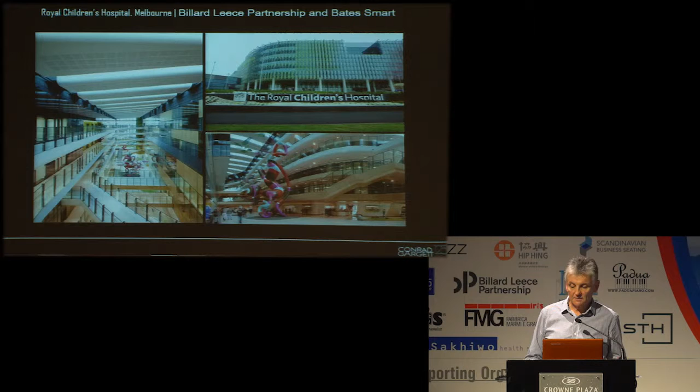But the first in the sequence of the three children's hospitals is in Melbourne, and you've all seen this one because I think it was the subject of numerous Academy Awards. It features, as many new hospitals do, a large naturally lit atrium to help organise the planning, the circulation and provide a less institutional environment. Currently under construction, due for completion in 2017, is the Children's Hospital in Perth. A similar scheme in many ways. It uses a large single atrium to create an internal armature for the building, lots of glass and plenty of light.

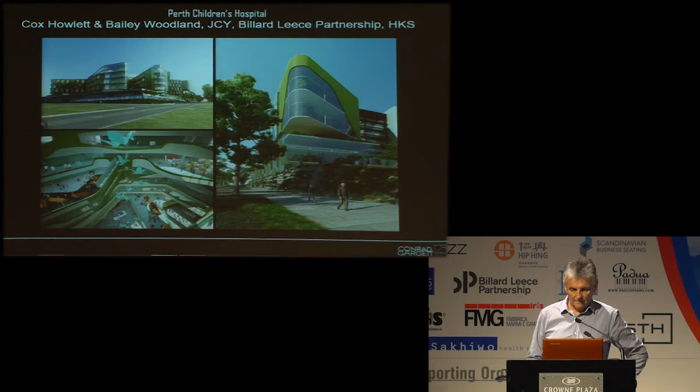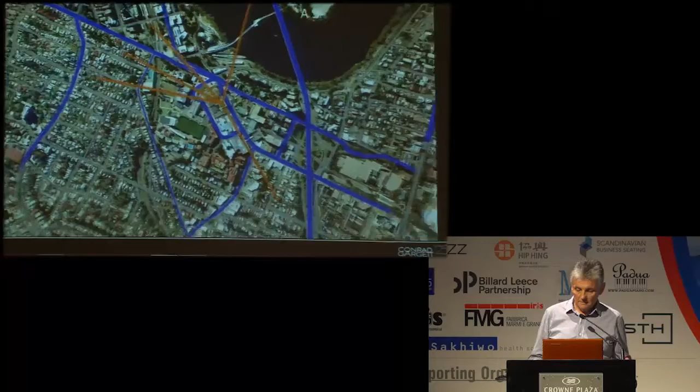Returning to Queensland, and this, the new Children's Hospital, which is now named the Lady Cilento Children's Hospital. Of a hub, a network of care across the state. It's the linchpin, but each element of that system of care is critical, from the community services through the regional secondary providers through to the teaching tertiary hospital that is the QCH. The QCH will reach out across the state, be that through outreach clinics, telehealth, or in fact for the sickest children retrieval services, to ensure that every child, no matter where they are in Queensland, has access to the very, very best care. So it's the hub of a very large network.

I might just ask you to turn the volume down on the videos, if you don't mind.

The hospital, while serving a large network throughout Queensland, is about 20 minutes walk from the CBD of the city. It's adjacent to the large Mater Hospital campus, which is both public and private, and two schools, and a major recreational park, the South Bank Parklands, for any of you who've been to Brisbane. It's very much an urban hospital in a tightly occupied environment with all the constraints of a brownfield site, busy roads, high pedestrian traffic and dense infrastructure.

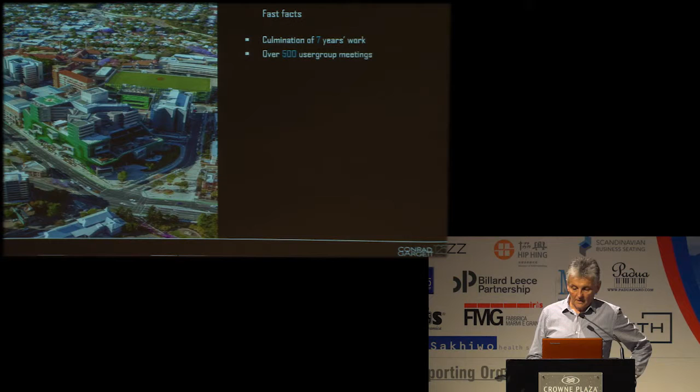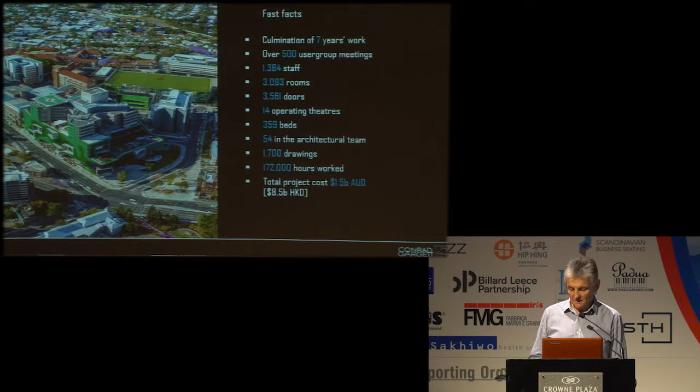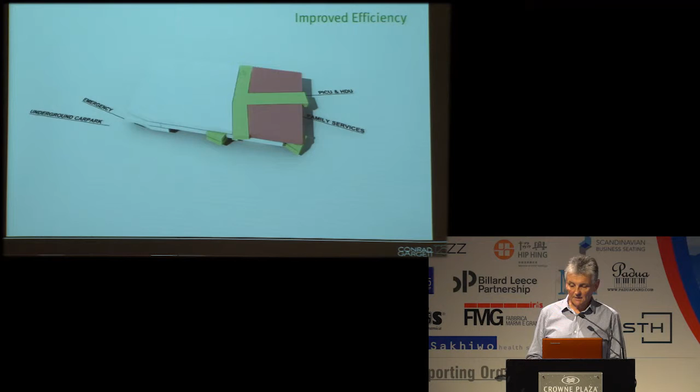This reflects our approach originally in bidding the project, which was the desire to deliver a more appropriate building type for a children's hospital. Not different from the general functioning of a hospital, so addressing all of the functional needs, but somehow creating a more appropriate hospital for children. A large tertiary hospital on a standalone facility reflecting key functional relationships, efficient clinical planning as required by hospitals, logical circulation with an efficient net to gross.

However, our contention was that it would not be, like many, a sealed box. Our approach was for a child and family-friendly building, a more normal, less institutional environment, and a much more connected and open building. It was a philosophy we'd been developing for some time, and here was our opportunity to put it into practice.

Our vision was for a new type of facility, open, connected to community, both physically and visually, permeable. For us, this was critical. Patients, particularly children, should not feel as though they've been taken out of their family and community, put in a sealed box and made to feel isolated and different.

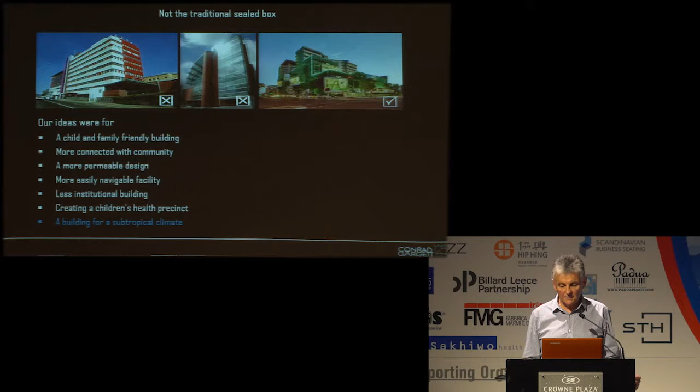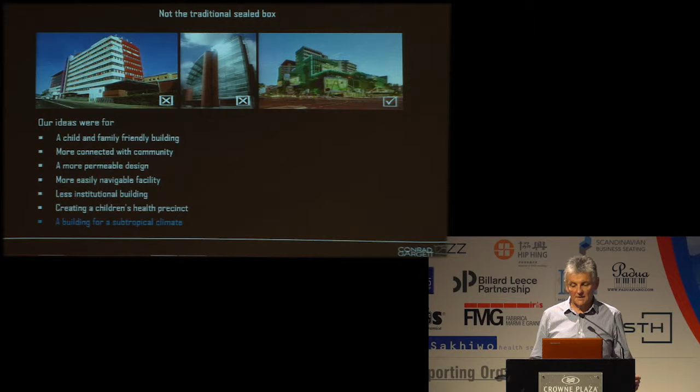Fortunately for us, these were jointly held philosophies of our client and across our design, and I might say construction and procurement team, everybody got it. Continually reinforced through extensive consultation and research. Brisbane's climate helps. Today in midwinter in Brisbane, it'll be 20 degrees, sunny, and with a humidity at about 48%, I think. Overnight it was a cool 8 degrees, so all of these factors allow us to open the building to the outside.

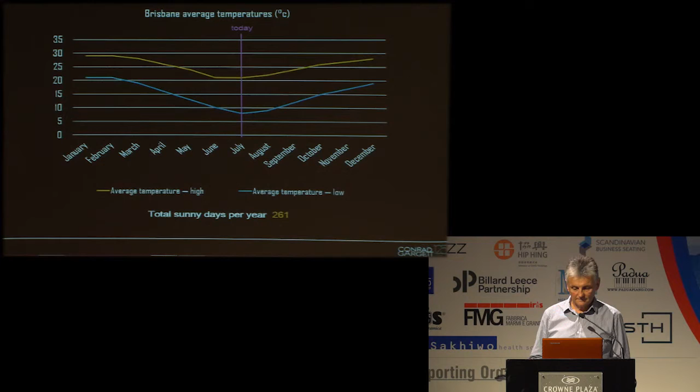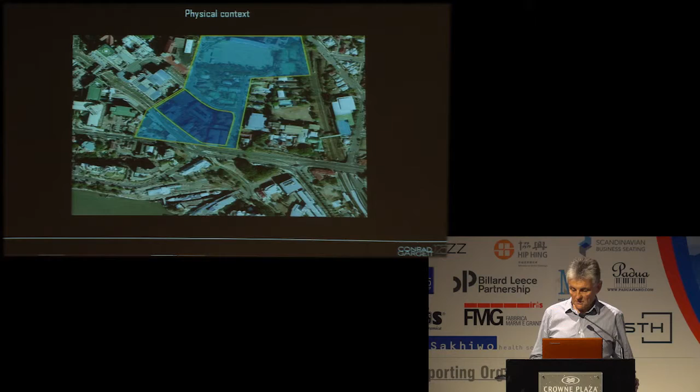Returning to the site, the actual site that we were master planning on was significant. The brief included a research facility, a central energy facility, carers accommodation, critical enabling works, as well as the main children's hospital. The major elements of this master plan have now been delivered. The hospital at more than 100,000 square metres, 20,000 square metre research building, and a central energy plant as well as the enabling works.

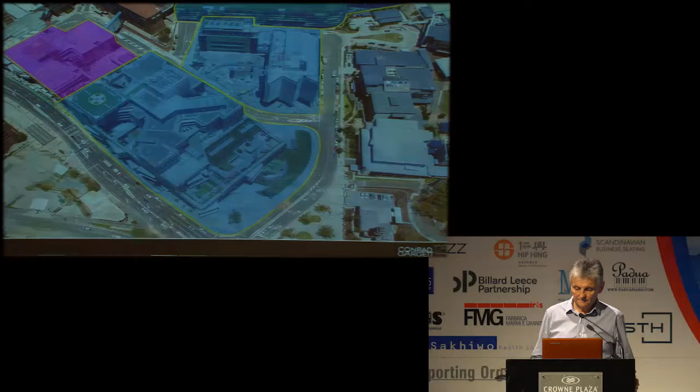And these are them in their context. A car park, raising a school's playing fields to campus level, the hospital, the central energy facility planned for the entire site, restoration of an existing bank building as the charitable hospital foundation, the site for carers accommodation, which is currently under construction, the new plaza, and a reconfigured intersection.

Designing the hospital started with a master plan for this larger project, but it was the envisioning of what the hospital represented as a healing environment happening in parallel that was to inform the look and feel of the building. Elements fundamental of the development were the concepts of connectivity and permeability, clearly demonstrated in this image. It was in the early workshops where the nature of the building was identified. So this was about a month or two into the project.

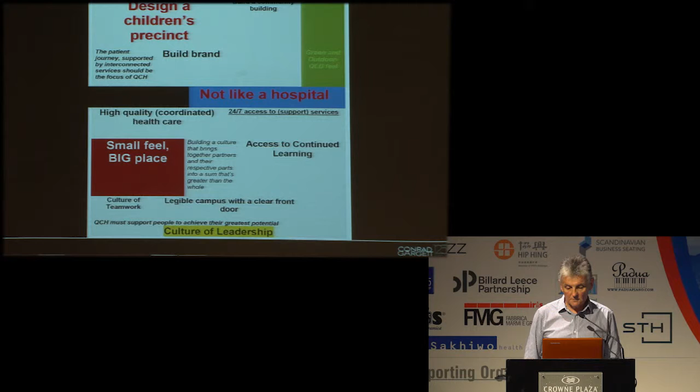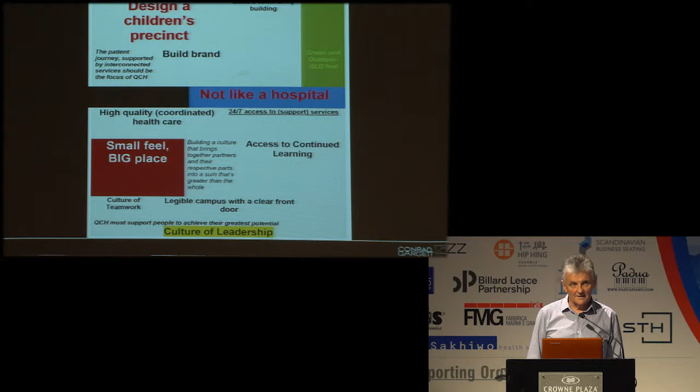This is a summary sheet of one of the early workshops with about 100 participants. It was a given that the detailed clinical requirements would be met. So whatever happened, it was going to be a functional hospital. But there were more aspirational and somewhat less tangible notions, ideas like making a big hospital feel small that had a lot of resonance, a legible campus, a building for the Queensland climate, and you can see there, not like a hospital. So we'd reached a kind of shared and cohesive vision.

Not like a hospital in many ways, but certainly a building focused on healing. Spaces for all aspects of healing. This is just one aspect of that. Places for engagement with activities far removed from the reasons for being there in the first place. It was this aspect of not a hospital that continued to inform the design, yet it was very much a research-based project.

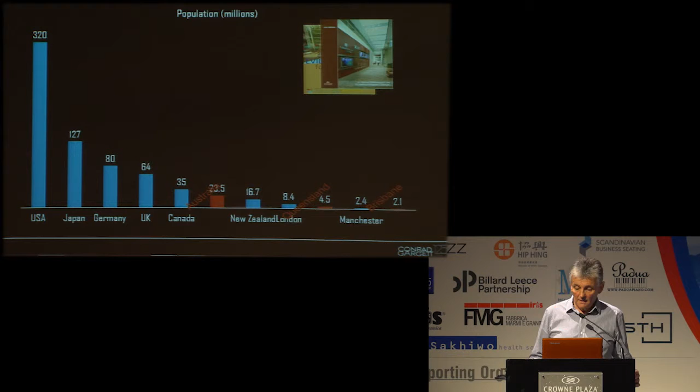Being a relatively small country, Australian architects instinctively look beyond our local experience. In fact, our small size could be considered an advantage. We tend to examine what the rest of the world's doing. Conferences like this, study tours, research. And given the significance of this project, we also engaged a full-time researcher to expand the conversation with our stakeholders.

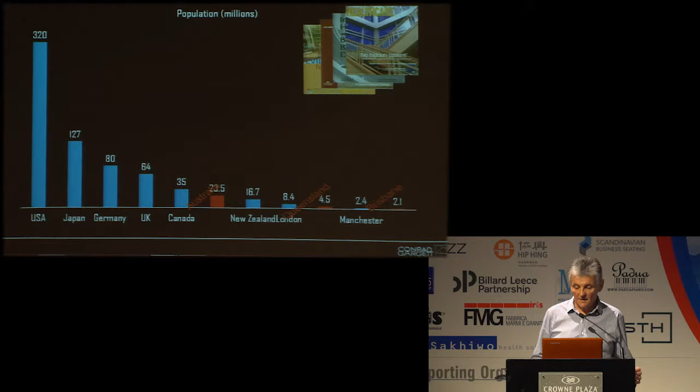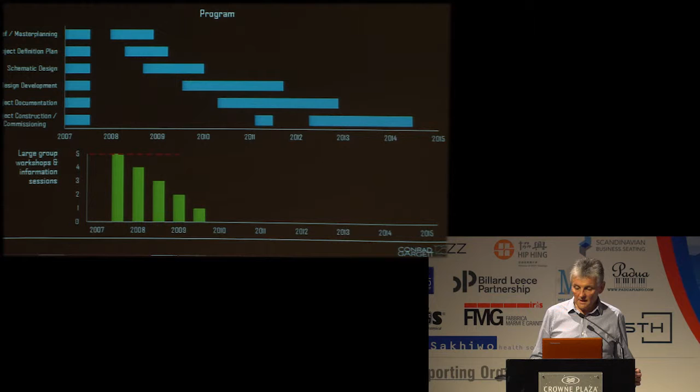Ensuring we had the best possible buy-in from all of the stakeholders was also critical. User group meetings peaked in the middle of the developed design, and they were crucial. We had large forum workshops, largely in the early phases of the project. These were inclusive of all departments, some quite dynamic. A number of town hall presentations and interactive work sessions. So the community was involved in this process.

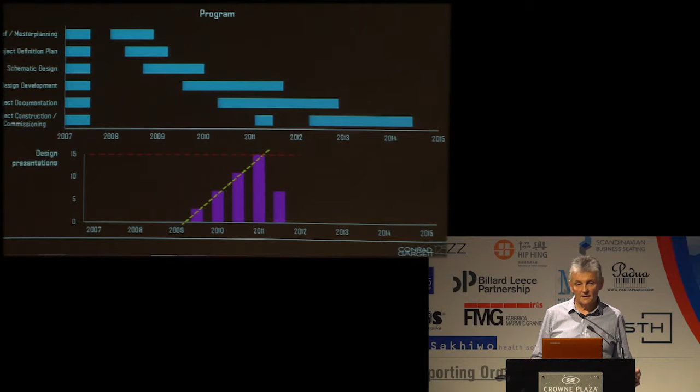And design presentations, from master planning to colour selections, art engagement growing towards the end of the design development period, as more and more detailed decisions were made. The sheer number and intensity of user group meetings at over 500 underpins ownership of the design. What worked best, and I'll just mention the top 5. There's a whole separate discussion on this kind of exhaustive consultation process.

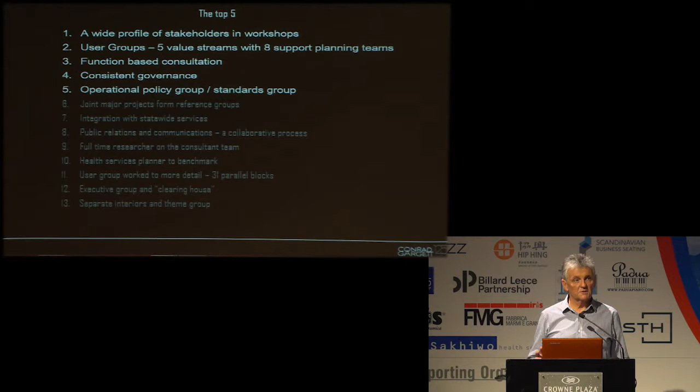The process which was aimed at engaging a vertical cross-section of stakeholders through the workshop series to combine cultures, universal aspirations and master planning principles. Early user groups were arranged into 5 value streams with 8 support planning teams for focus on services rather than the familiar departmental culture. Consultation was function-based and process rather than room-based. It was supported by governance consistently throughout the project, and there were standards groups set up to examine benchmarks and standards, which there was some discussion about earlier in this conference.

In the process, all aspects of planning for this building were rethought. There were feasibility studies and comparative analysis for every conceivable aspect, a consultation process delivering planning that promoted a more collegiate approach. So this was scratching away at some of those silos one finds in all professions and that have certainly been discussed here during this conference.

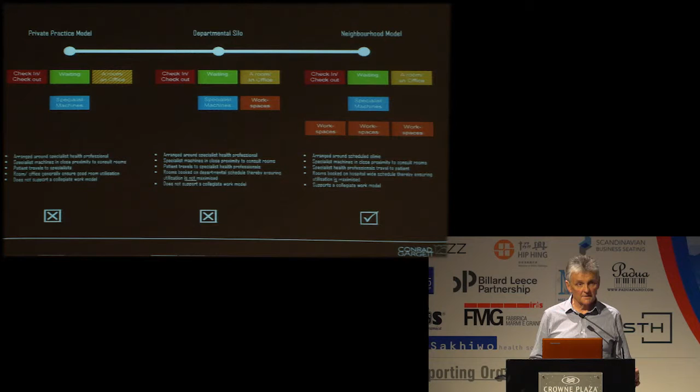The patient journey for different types of stays was reviewed for efficiency as well as for patient focus and examined for ways to reduce stress levels. This was critical in the process of healing, making the intervention as effective as possible. This came out more and more in our research that environment really does have an impact on healing. Everything about being a hospital was re-examined in a highly consultative and constructive environment.

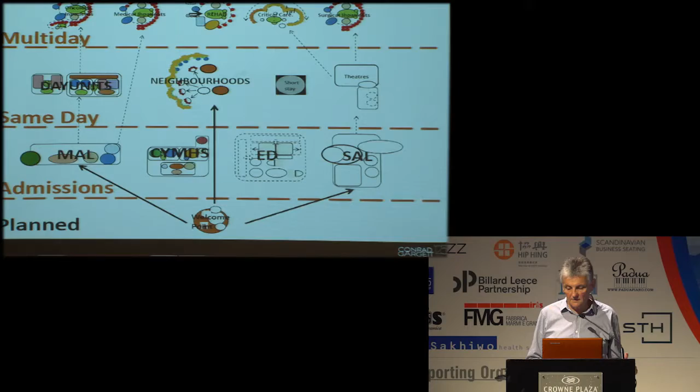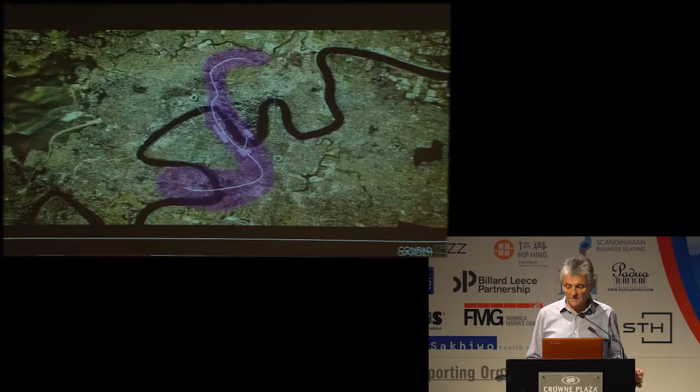So while the process was focusing largely on clinical planning, the aspects of connectedness and permeability were also being examined in the context of the city, and the hospital as part of a larger picture of health and research facilities across the city, connected from Royal Brisbane Hospital to the University of Queensland in the south, a distance of 9 kilometres.

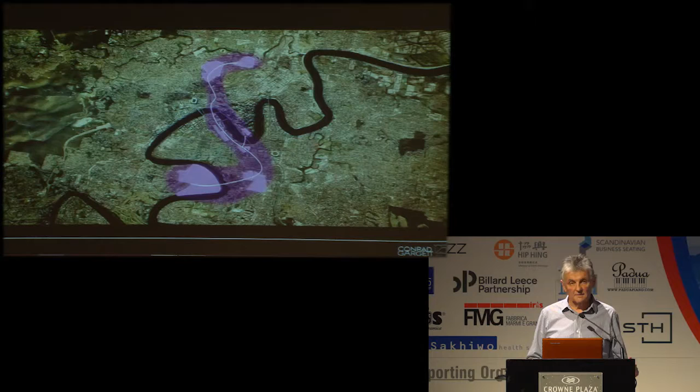A hospital in context of the city and its immediate neighbours and connected to the city and to its surroundings, one where connection is depicted from above, where the spine of South Bank Parklands, the arbour, terminates, but then links through to the civic plaza of the hospital and the hospital itself connected to the adjacent health facilities and pedestrian networks.

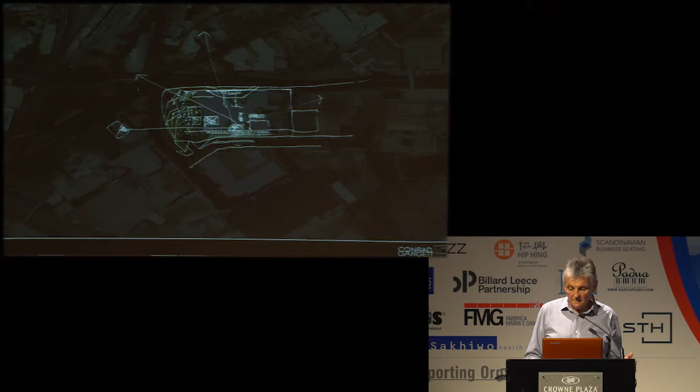But back to the smaller canvas, the connected, permeable hospital. There's always one defining idea, and for architects this is often a sketch. So this was about being able to see in and to see out of the hospital, connecting it to its environment.

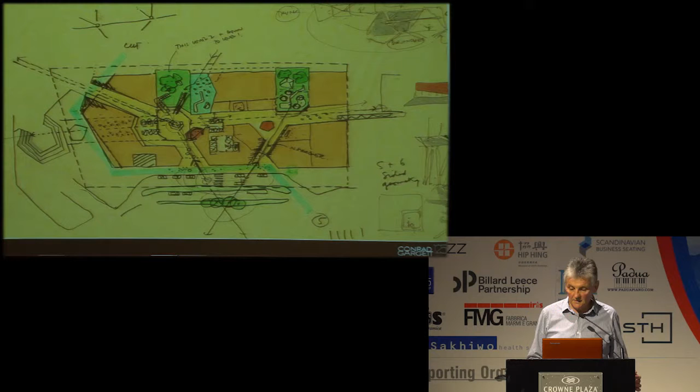The form of the planning emerges from the principles of circulation and connection, designing and planning the circulation spaces with the same care as the clinical departments. This block planning, obviously not yet showing the departmental planning, focuses on public spaces, orientation and circulation. Principles of permeability start linking through the site, both across and longitudinally. You can see the importance of this from the earliest drawings, concepts eventually realised in the final planning.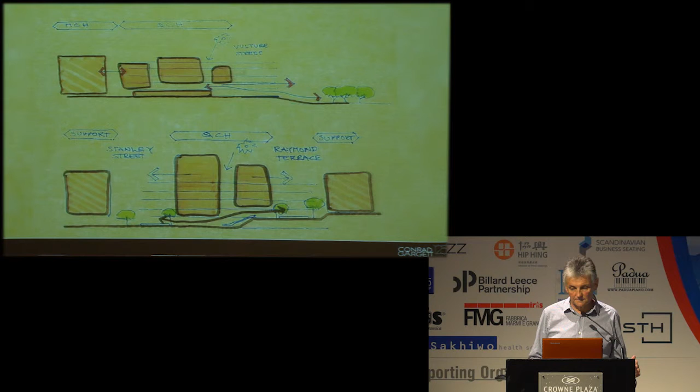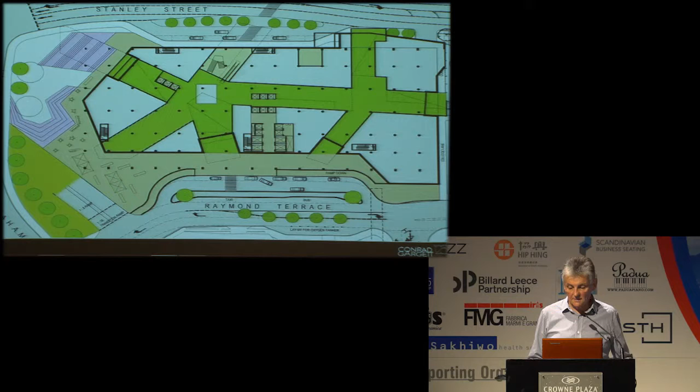As the plan develops, those principles are reinforced through the design of the public zone, here shown in green internally and beige covered external space, noting how the ground floor is pulled back under the building to create a kind of veranda, which is a very traditional Queensland thing, to invite pedestrian flow and connectivity. And on the ground plane, the 3 main entries make use of the undercover edge to emphasise these points of access. They also provided protective space for the hospital community as well as the local community, enhancing public amenity.

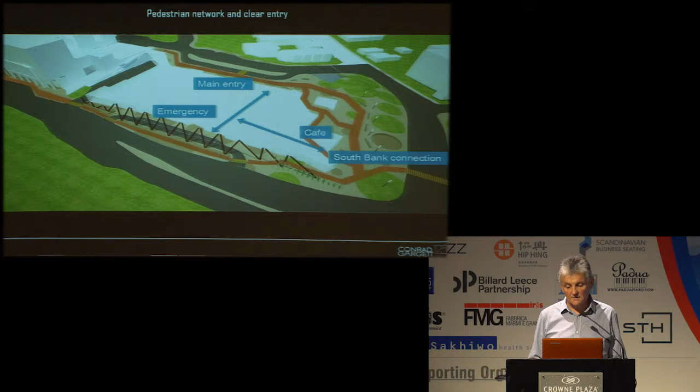Access is demonstrated over these 2 levels of the ground plane, emergency and main entry, noting that the edge structure is designed to accommodate pedestrian movement, shelter and protection from the traffic environment. Cafe and plaza are shared between the hospital and the community, the approach to permeability and connectivity influencing the building form at the ground plane.

This is a sort of rudimentary CAD model, and we used a lot of this during the process to convey what we were trying to get at. They're very simple tools, but much more useful in describing the essence of the building than plan and section. And this is that same view in operation.

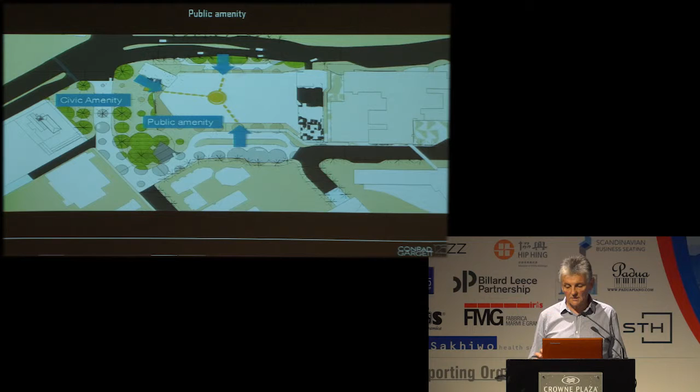This is the Stanley Street entrance adjacent to emergency, which is a very heavily trafficked road, connected up then to the main entrance via escalators. The covered space under the building's edge provides that sort of sheltered environment around 3 sides of the building, shelter and a filter from the traffic. 3 points of entry, all leading to the central point within the building and paths of circulation, all connected directly to the new civic open space.

Slightly complicated diagram trying to express connectivity around the precinct. The Stanley Street emergency drop-off linked through the building to the quieter main entrance on the other side and taking up the grade separation across the site. There's also links to the South Bank parklands together with anticipated interaction with adjacent school pedestrian traffic. One gets the feeling of a normal environment for patients and their families, all as part of the community.

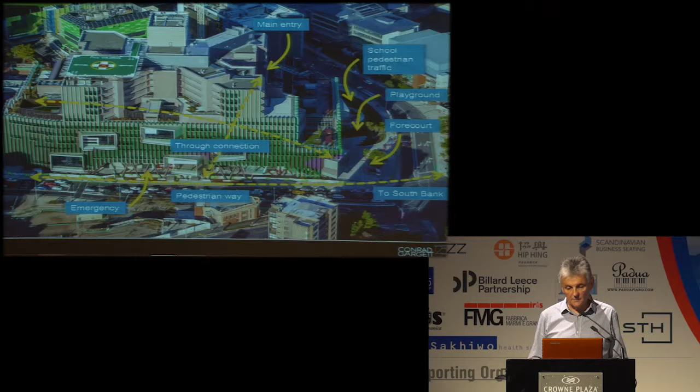The public circulation and gathering spaces have other significant uses and also explain why this building looks and feels different. Although a deep plan building with a complex arrangement of clinical spaces, it has a public realm that's open and welcoming. Public circulation extends through the external face of the building to enhance the idea of connection. The vertical linkages via the atria at nodes in the circulation space start to be realised in these early planning diagrams. The public spaces of the building, one can see, will be visible to the community.

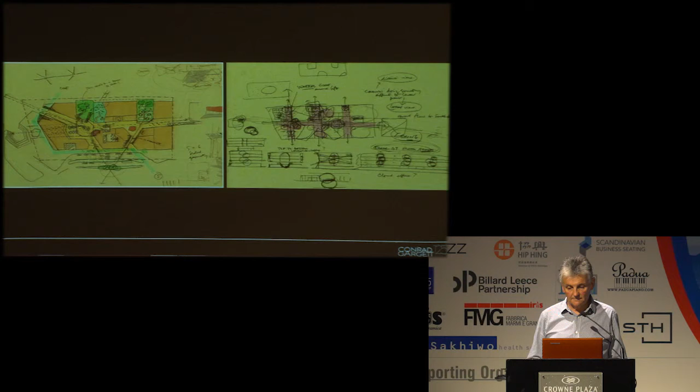Navigation through the hospital will be intuitive, aided by the views to the outside for orientation, an open building allowing people to connect from inside to outside and outside to in. So this is part of making the building more easily navigable, this armature of the building.

This is a model of the public circulation in the building. Earlier in the planning, these were referred to as the arteries or anatomy of the buildings. We've since referred to them in a kind of tree analogy as trunks and branches. Trunks for the vertical atria, and branches, the two-storey horizontal space. Mapping this public volume has led to a different planning outcome.

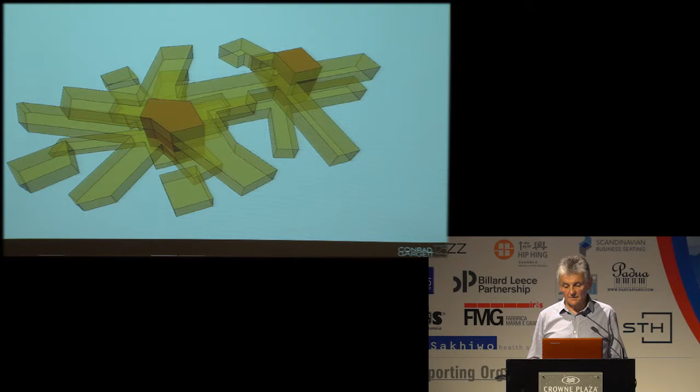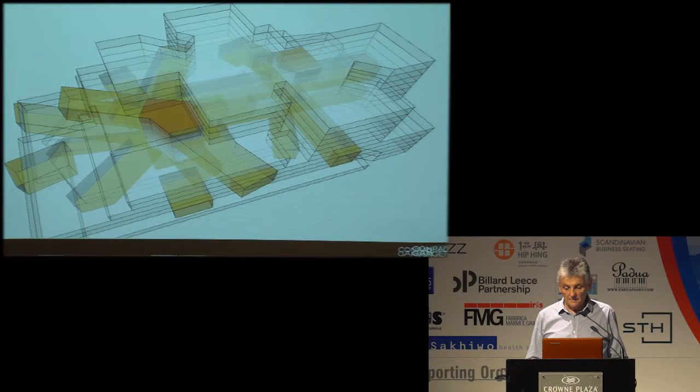These are the trunks and branches in relationship to the building as a whole. The circulation is also expressed through the skin of the building. And you can see here an early model, block model. Branch ends are prominent and visible and promote connection, again, making this hospital a different entity to other contemporary health facilities.

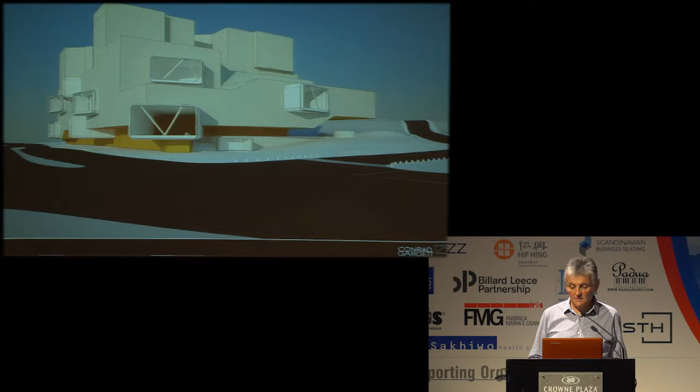And these apertures are large enough to be read in the urban scale. They give life inside to outside and outside to inside. The branches also aid in getting natural light and air into the building. These are the branch ends as they emerge through the facade on the main arterial side of the building. The double height giving these apertures appropriate scale and allowing the penetration of light deep into the plan.

While similar in their nature, all branches are driven by the particular requirements of the internal functions and are therefore different in configuration. The degree of enclosure differs, as does the predominant angle of view, usually oriented towards a landmark, again, reinforcing that navigation. The importance here is not just being able to see out, but to be able to see in. The art and public areas within are quite visible.

This is a branch of the South Bank corner looking towards the city. In an added function, this space is very much part of the arts program, supporting all manner of performance, from dance to trapeze, from concerts to painting. And they're also available to those who can't get there via the patient entertainment system, so you can see what's happening from your bed.

From the branch, it's just a short walk to the centre of the hospital, an interior infused with natural light and colour. These public spaces are also naturally ventilated. They're decidedly child-friendly, and they don't necessarily look like a hospital. This is the main reception. The light comes deep into the interior from both branch ends and vertically, as I said earlier.

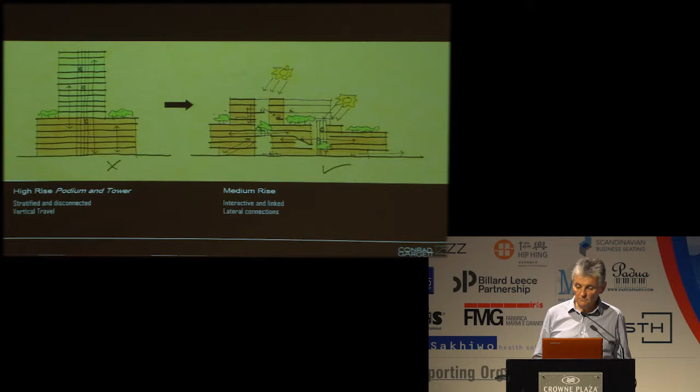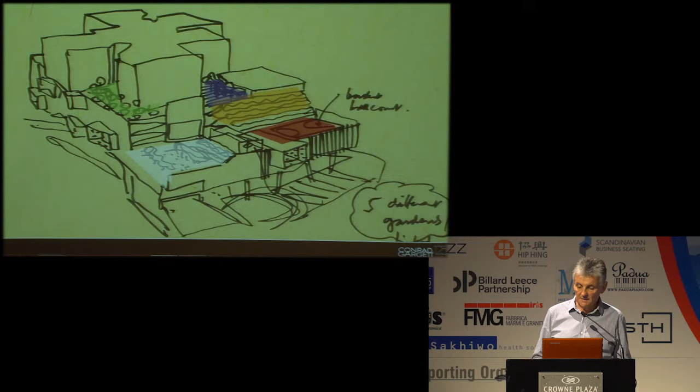This approach is facilitated by the way the building is assembled, not as a traditional urban podium and tower, but a new model with a different form evolving. The form in stepping back provides the opportunity for making more of the roof space, providing gardens for differing functions.

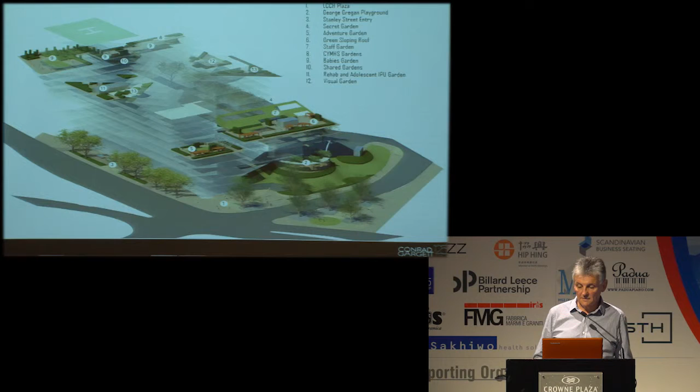From the dense urban side, we've extracted a whole series of gardens, and my colleague Katarina will talk to you about the landscape architecture in detail. It's a critical component of the integrated design of this facility. Some of the gardens are designed to stimulate active participation, others absorption in the materiality of the ever-present green. Which is a nice segue into the colours of the building.

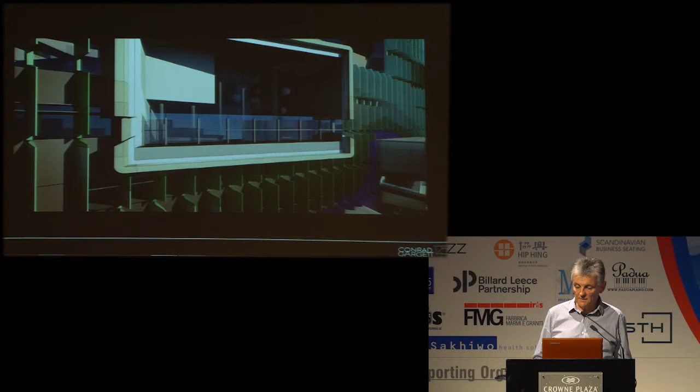This is one of the many colour schemes which was universally chosen and developed for the application on the facade. The main building is protected from the sun by a series of fins that wrap around the building, a combination of vertical and horizontal blades. They protect from heat load, but also use the top of the horizontal blades to reflect light deeper into the building. You can see there the colours of the building are reflected from the context and reflected in the facade, so it's a very interesting outcome.

Whilst there is a richness and playfulness in the building, it's also mirrored internally in the arts program. These are the open spaces where the great opportunity for arts is exploited. Not only enlivening the spaces, but giving some proven therapeutic benefit, distraction, refocusing attention from anxiety. These are the major pieces of art in their concept phase, and these are them in the building.

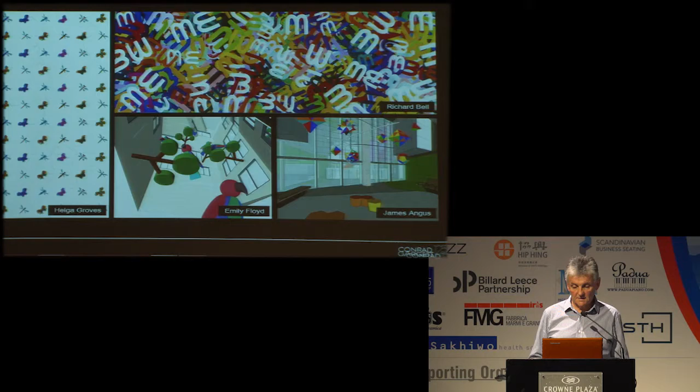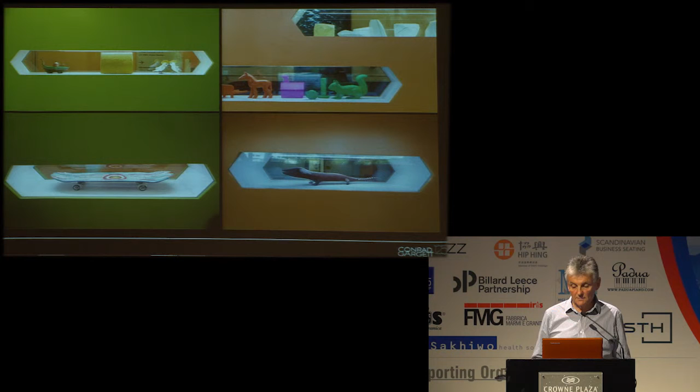So the light-filled atria are alive with both visual arts and sounds. Here a family of parrots occupies the space. Vitrines throughout the building are replenished on an ongoing basis by, in this case, the Queensland Museum. But the arts program is not just about art on the walls, it's about performance. So the public spaces, I think I'm getting the wind up, all sorts of activities.

This is the building in the context of the city. The building as we saw it at the end of the design phase. The building as it is, commissioned and in operation. It's attracted a lot of attention and it's become a very important landmark in the city.

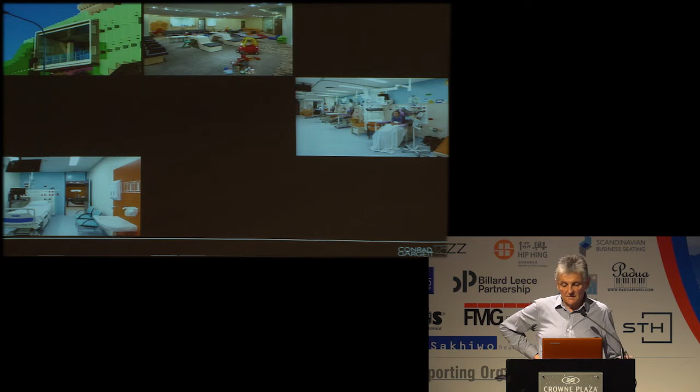So this is a building that celebrates its climate, its openness; both research and thorough consultation processes have informed the design and hence the outcome. A long process in focused design and planning leads to an increasing body of knowledge which can now inform the planning of other projects that we're delivering.